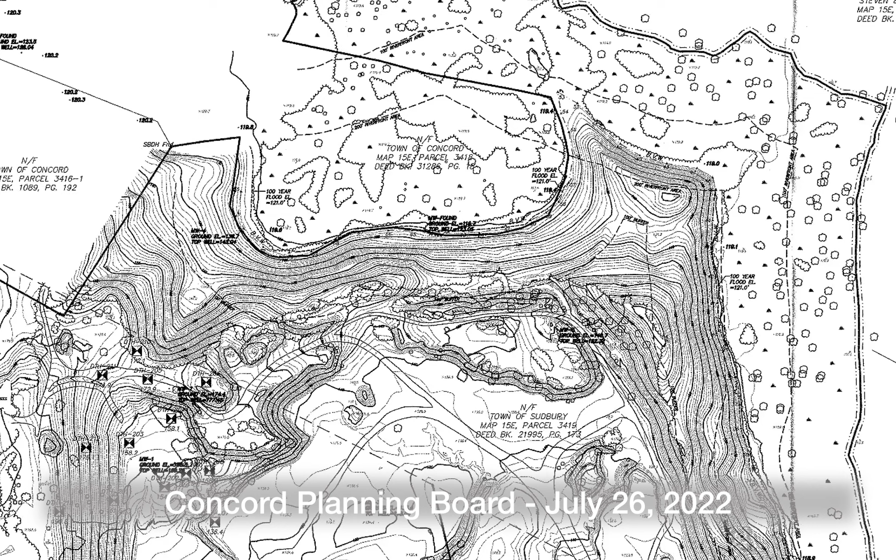You want me to stay on the existing condition screen? Yeah, if you don't mind going back to the existing conditions. So the tract itself, the portion of the tract that is in Concord, which is the subject of this PRD, as you can see from the existing topography, it really kind of tells a story that much of this tract was mined for sand and gravel.

You can see the slopes that kind of flank, so north is up on this plan, and you can see the existing slopes that flank the northern and sort of the eastern edge of where the historic gravel mining operation had occurred. And as you'll see on subsequent slides here, the proposed development is substantially, if not entirely, contained within that formerly disturbed area of the gravel mining operation.

So the topography is such that there is a slope that kind of slopes down into this site, into the proposed development or developed part of the site. And today it almost forms sort of a bowl, if you will, in terms of the topography. So it's kind of been hollowed out from the sand and gravel that was mined in the past from this area. So Chris, if you can advance to the next slide.

Let me just point out one thing. Well, actually, I'll be quiet. Okay, next slide. This is okay.

So this is one of the sheets from the plan set that has been submitted. I wanted to show this first in terms of the proposed project, because it provides an overview of the land use areas that are proposed to comprise this PRD development. So the bold line there outlines the site in its entirety. That bold, dark, thick black line, that is the 16-acre portion of the property that comprises the proposed PRD.

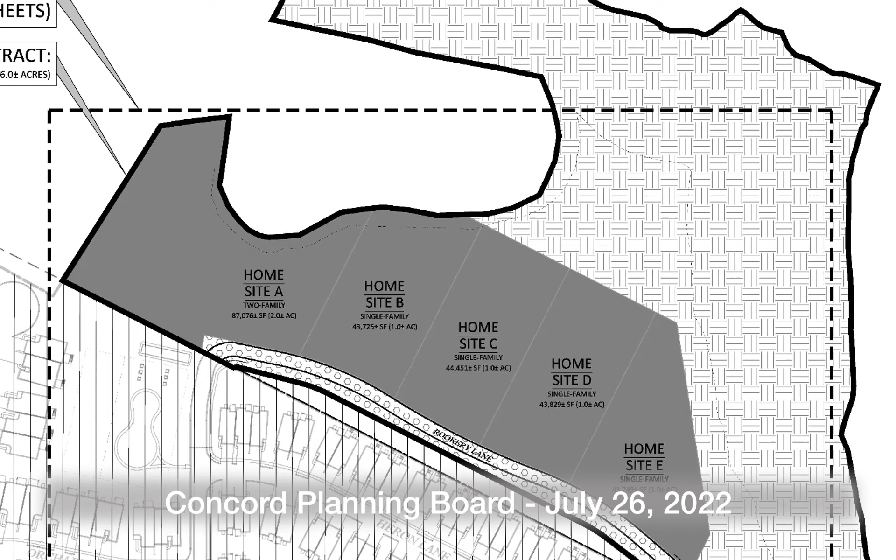So the next slide, when we go to it, we'll zoom in. If you see, there's a dash, Chris, if you can go back. Oh, yeah. Sorry. Yep. So there's sort of a dashed boxed outline area. Since much of the PRD tract is this open space, I want to just zoom in, and the plans do zoom in on the portion of this tract that is proposed to be developed. So if you can go to that next slide, Chris, please.

So this is essentially just a colored up version of the site plan that's been submitted. You can see the 6 homes here. So on the left side, or the west side, is the duplex. So that's 2 single-family homes attached. And then to the right of that, or the east of that, are the 4 detached single-family homes. All 6 of them front on Rookery Lane, which is a proposed private roadway or private driveway to serve these 6 homes.

The homes themselves will each have individual driveways off of Rookery Lane, similar to any type of residential single-family development. Rookery Lane will tie into and be accessed from the road network that is approved and under construction currently in Sudbury. I know this plan unfortunately doesn't show the road itself. If you were to go back to the previous plan, it does show that, but essentially it just connects to the approved network in Sudbury and creates a loop.

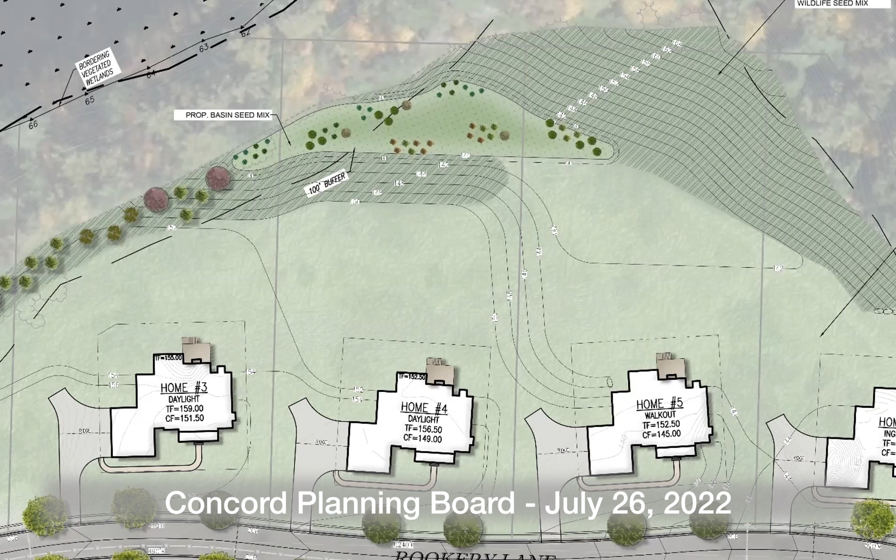And so the limit of work there, which is the limit of the color on this site plan, is the limit of the former gravel operation. And while we have smoothed the slopes out and we will be restoring them with loaming and seeding and various seed mixtures depending on the part of the site, and it's all detailed on the landscape plan, to Chris's point, it flows inward into this site and into that bioretention area to undergo the treatment.

I think that's important because all of this land here will be in a conservation restriction. And there's a blue heron rookery back in here. We were very conscious of that when we were designing this. So, with that, Chris, I'll turn it back over to you to begin the next part of the presentation.

Okay, so if the board wishes, I was going to just go through the homes that are proposed and the floor plans. Chair, that's acceptable? Yeah, that would be great. Please continue. All right, very good. So we haven't named these houses yet. I call the duplex an M plan. So we have one of those.

Each side has a 2-car garage and they're 4 bedrooms. On the front elevation, one side has a side loading garage and the other side has a front loading garage. And then on the single family side, we submitted with this application 4 different floor plans for 4 different homes to give the public a choice on what might fit. When Matt did his layout on his civil plans, he made sure that all these home options could fit within the footprint allocated for each one of these home locations.

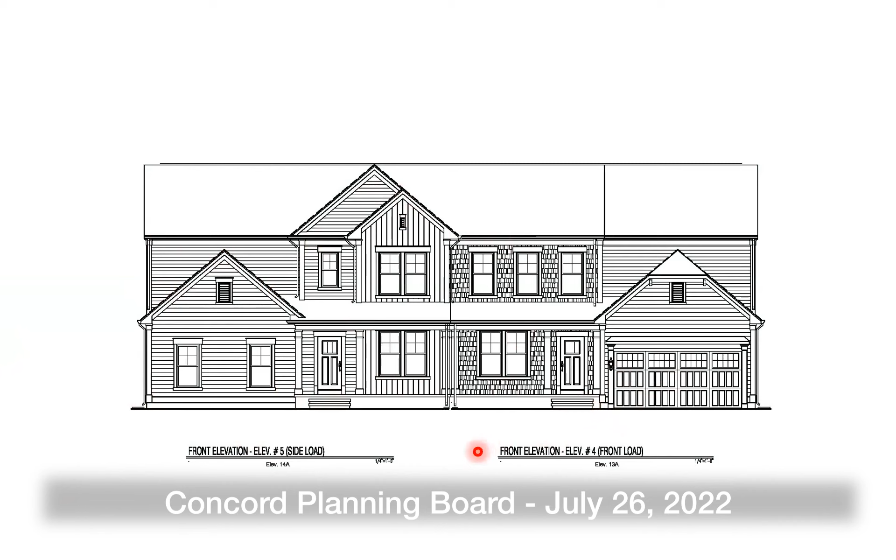All the appliances will be Energy Star, and we're incorporating energy efficient building designs into each one of these homes with insulation, high efficiency HVAC systems, and low or no VOC materials. So the first plan is the duplex. It's not a colored plan. This is the M plan. This side has a side loading garage. This is the front loading garage. Sorry, it's not colored. We have some gables for the front architecture. Both front doors are right in the front. It's a 2-story design, and there'll be a basement that goes underneath each side.

Zoom in here to give you a better picture of this. So this is the first floor of the duplex, the 2-car garage. The first floor is all living space where you have your kitchen opening up into an everything room or gathering room. A little nook here for your breakfast table. This is flex space; people might want a front room or a dining room or turn it into an office. If they don't, this would be their little office here.

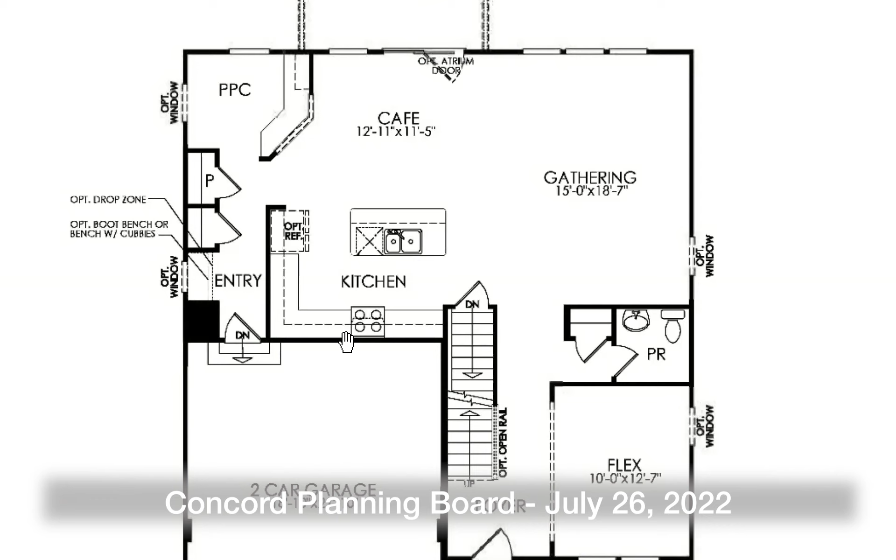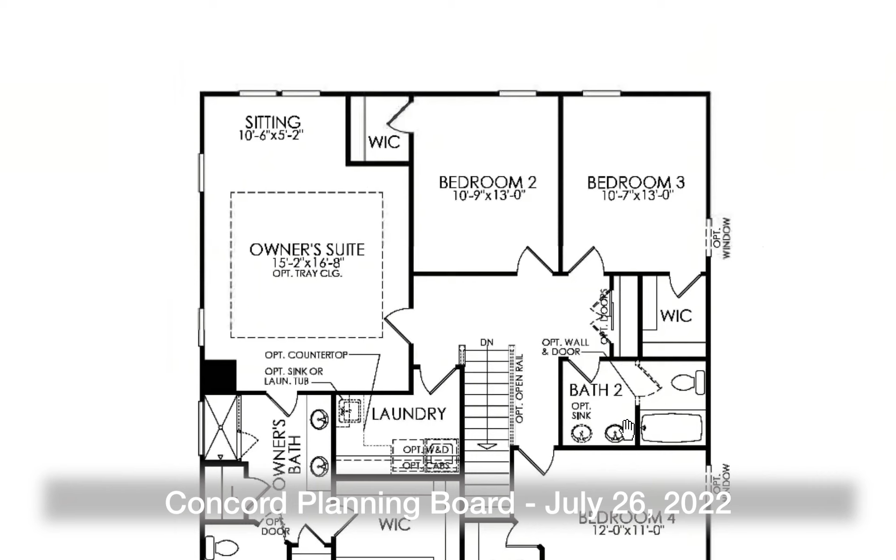Going upstairs here to the second floor, that's where all the bedrooms are located. Owner's suite is en suite with its own bathroom. We have the laundry upstairs because all the bedrooms are up here. Bedrooms 2, 3, and 4 share this bath here. So that's the floor plan for the duplexes.

Zooming in on the floor plans. Again, all the single family homes will have a basement and two floors above it. They're all consistent, and all the bedrooms are on the second floor. So this plan, our C plan, when you come in the entry foyer, the formal living room is on your right-hand side. Dining room is easy access off the kitchen.

This is the everything room, or the family room, and we have an office or library here off of that. We incorporated a deck into this plan. On the second floor, that's where all the bedrooms are. The owner's suite takes up a good portion, maybe about half of the second floor. We have a Jack and Jill setup with the bathroom here for bedrooms 3 and 4, and bedroom 2 is en suite. We want to offer some options.

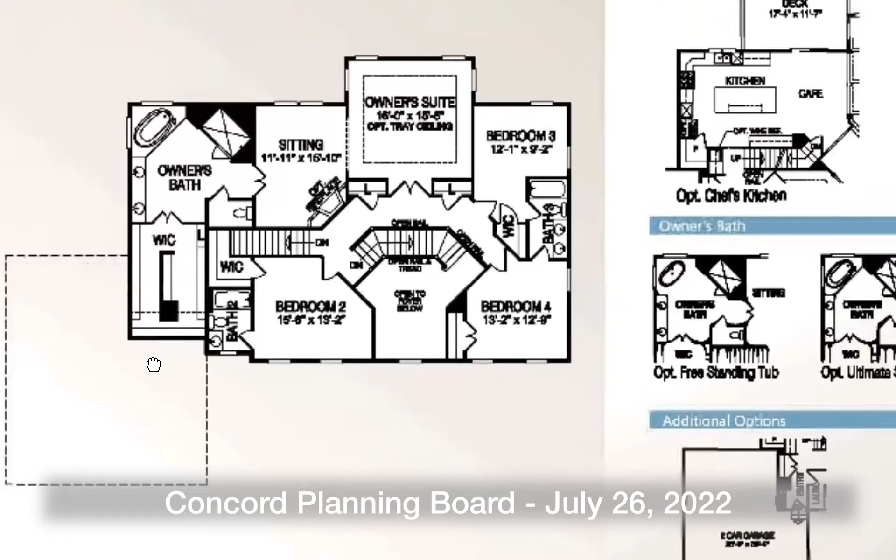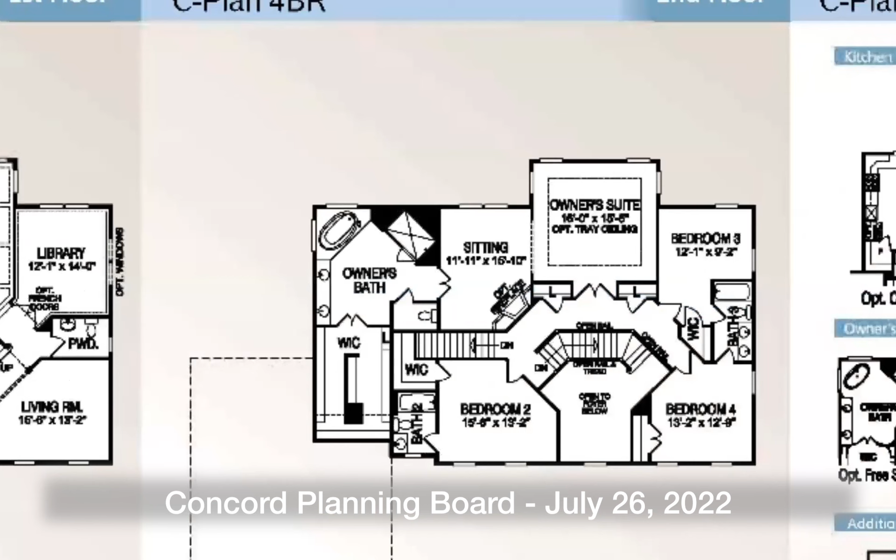We have a chef's kitchen, but what we call the chef's kitchen was when we were going to put gas in the kitchen, and so this option will go away. There's no gas, but we do offer the option to turn this room into a sunroom or a 3-season room. And then on the owner's suite, we have some options on how to finish off the baths with the standalone tubs, or more shower heads in the shower, those types of things.

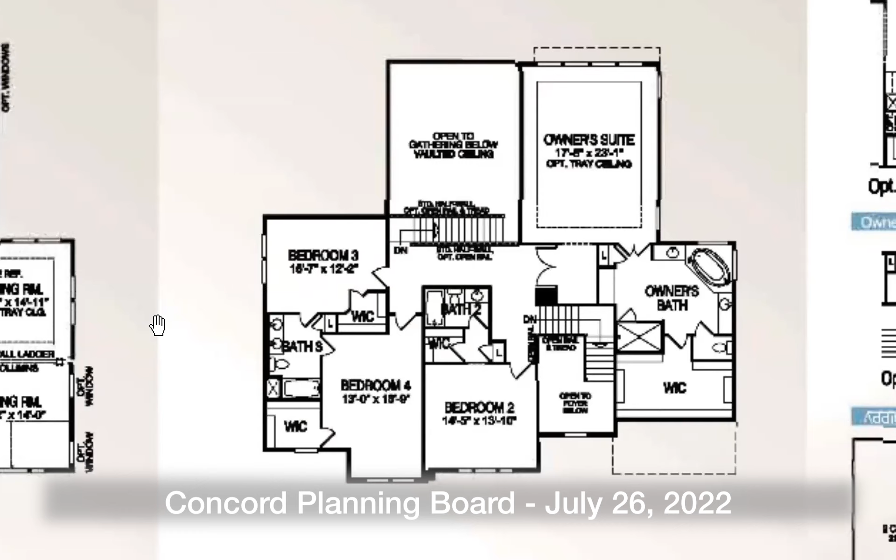K plan, we have one elevation with the K plan. Again, these are all colonial style homes. And zooming in, the second floor again has all the bedrooms. A little bit different layout here for the first floor. Still have the living room and dining room off of the foyer, but the kitchen and gathering room are oriented slightly different.

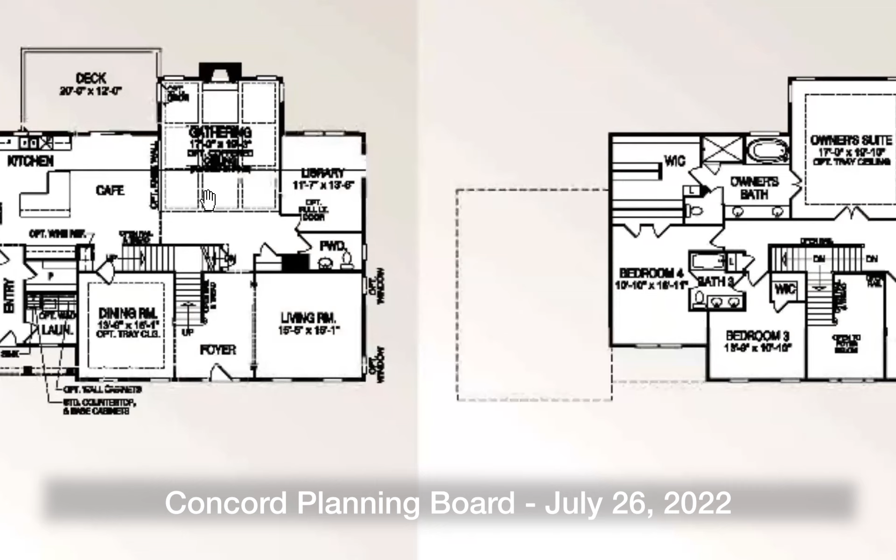And the last plan is our W plan. Again, it's another traditional colonial look. Zooming in on it, bedrooms are all on the second floor. Owner's suite takes up about half of the second floor. Living room and dining room are off the foyer. The space where you do most of your living is right here, where the kitchen and the gathering room are side by side. That's a quick overview of the floor plans.

I was going to go into a quick landscape review, if that's okay. We hired Bowler to do the landscape design for us, and they provided a plan for the single family homes and the duplexes, and then they gave us an overall plan for the rest of the property. This is the overall plan for the rest of the property, and this table here highlights the plant palette. I can go through that if it's of interest to the board.

I can tell you that we were conscious of the plant palette that was selected, and we tried to focus on plant material that could serve multiple purposes, and we felt that having some plants that could bear berries and fruits for wildlife would be important. The seed mix that we have proposed for other areas is also to help with pollinators, so we were conscious of that with the landscape plan.

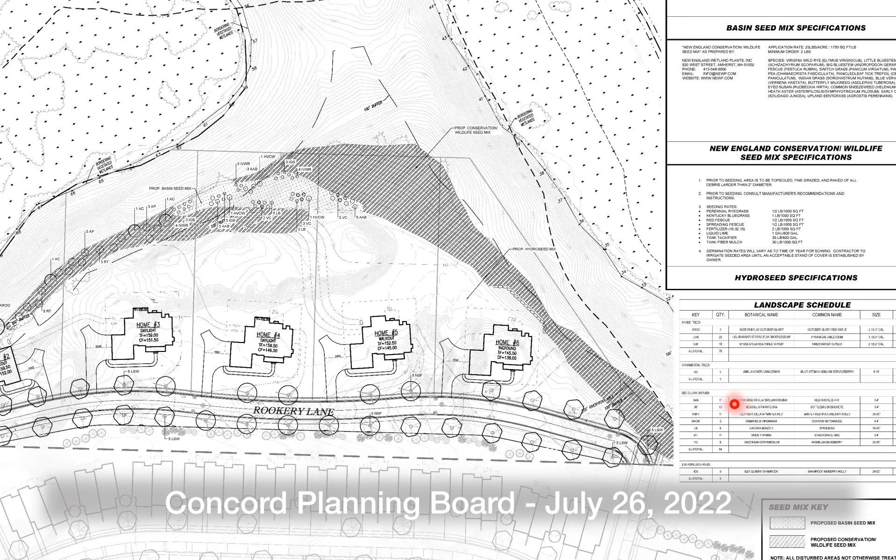And this is the basic landscape plan for the single family home and for the duplex. It includes some deciduous trees, evergreens, and some shade trees and some ground cover. Very, very straightforward. So that's the end of the overview.

I just wanted to share with you a couple of comments on the town planner's report that we received. There were a couple of items that were highlighted that I wanted to bring to your attention. We understand that the diversity of dwelling units needs to be addressed, and we're going to address that with staff.

One of the checklists is the difference in price points. I can tell you that this duplex will be priced probably $500,000 to $700,000 less expensive than a single family home. We haven't got that far in determining what the value or what we can sell these things for. As you can appreciate, the whole world of construction changes by the minute nowadays.

But we do know that the duplexes will be significantly less expensive. We will follow up with planning on addressing that.

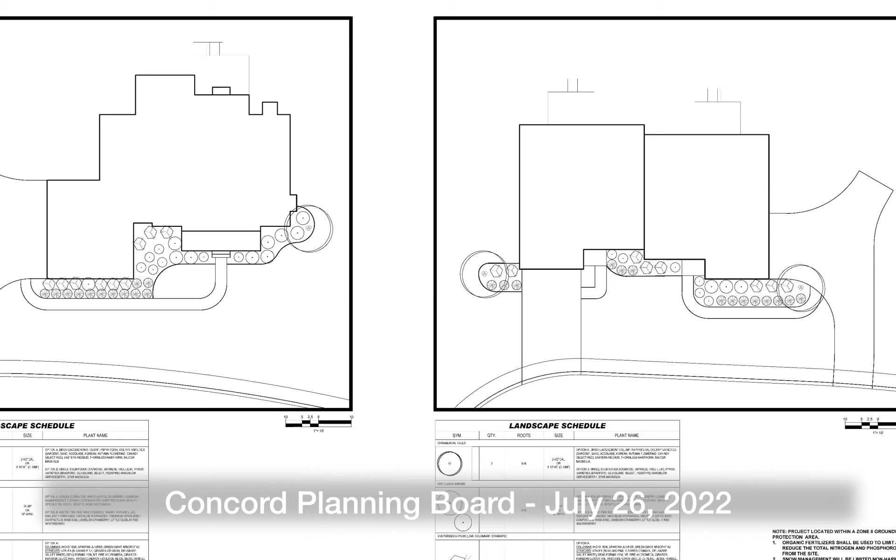Within that home footprint, the existing topography varies from the 150s to almost 170, so we're right in that range with the proposed footprint of that home. As you move farther east on the page, we end up more in a fill condition. So I'd say the duplex is probably the closest to existing grade of any of the homes.

As you move toward the east on the project, the existing depression or cut becomes more significant. In order to harmonize with the land itself, but also with the adjacent development in Sudbury and the perimeter grading of the former gravel pit, we fill more and more as we go east. So the homes toward the east are in more of a fill condition than that duplex home on the west end.

So, are you able to go back to one of the earlier slides that showed the topography? The black and white one, I think. Yep, kind of where you had the mouse hovering just there. Right.

It seems like basically to the northeast, northwest of where the duplexes are, that's quite a steep incline. Is that correct? Yeah, it's correct. Not just to the northwest of that duplex, but really that northern edge of that slope, which slopes northward toward the wetland beyond it, which is where it flattens out. That whole outer slope is steep, and we've intentionally stayed off of that slope.

And there's no work that needs to be done in terms of any retaining wall to secure that? It just seems very close to where the duplex is. No, you're correct, there's no retaining wall. The grade in that area—as I mentioned, that duplex is the closest of any of the buildings to existing grade—it's for that very reason, because we want to more or less match the existing grade there. We don't want any significant cut or filling in that area because of the slopes.

As you move to the east, it's hard to pick up on this plan at this scale, but that steep slope wraps the northern edge and then wraps down the page to the east. The northern half of that is sloping toward the wetlands, but the southern half is actually sloping into the site to the south. There's a ridge—that's all a ridge line—and we're contained within that ridge line.

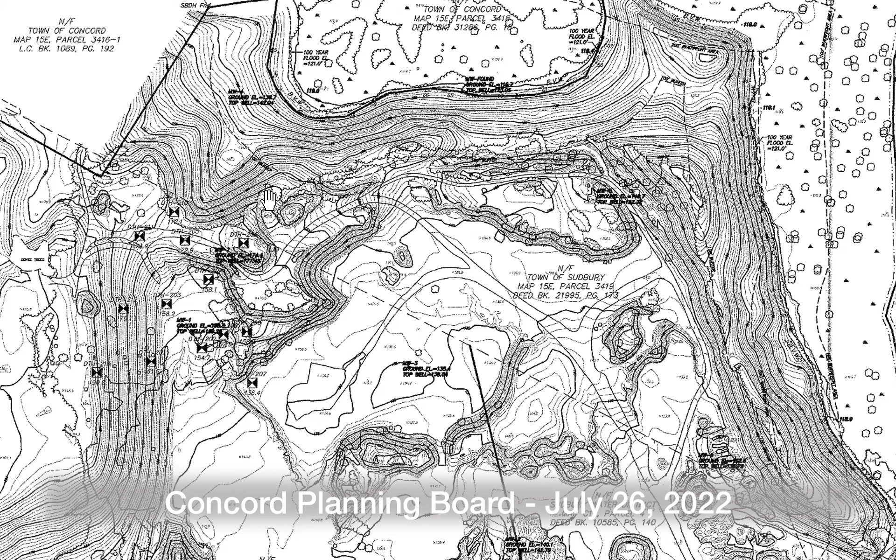So it's really just that western end you're talking about, that's not as much of a ridge as just a slope out toward the wetland. That's where we've matched more or less the existing grade, to prevent any significant grading and certainly no retaining wall up in that area. So we're pretty well married to the existing grade on that western end for that very reason. That's a great question, great, thank you.

Just two more quick questions. For the EV charging, is the plan to have 240 outlets in the garages for each of the existing spaces, or just one? I don't know the answer to that—I'll have to talk to the architect. I think from a market standpoint, if people want an EV charging station for each stall, we're going to put it in for them.

The only other question I had is about the driveways. It looks like currently all of the houses are oriented so the garages face basically to the west. Elizabeth, this might be more of a question for you—what are the rules around having a shared driveway? Say if the four single family homes had garages facing each other and shared a common driveway to reduce the amount of impervious surface.

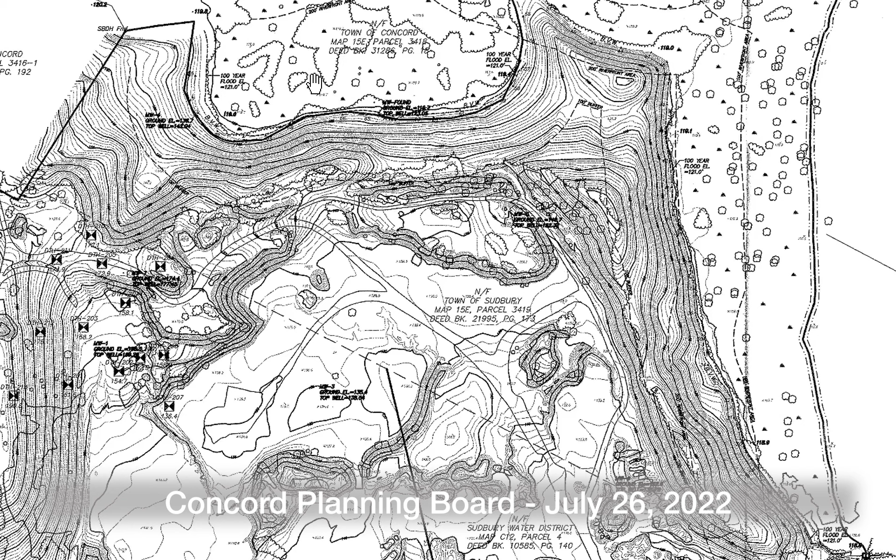And so the homes themselves are stepping down, with the duplexes being the highest of all six. Every single home steps down vertically as you go eastward. So we very intentionally have the driveways separate from one another, and also all on the west side, which is the high side of the units.

The reason we do that is because of the elevations of the homes themselves, so the top of foundation elevation, we set that based on the road grade along that particular lot's frontage. We don't want a home depressed or lower than the road grade. That's really kind of a no-no from an engineering standpoint. It's not desirable. We want the home to be at or slightly above the road grade.

So in this case, it's really the road grade at the high end, the left end of each lot, that sets the house grade, the top of foundation. Having the driveway on the uphill side allows us to have a very gently sloped driveway coming into that unit.

If we were to either combine and share driveways for adjacent units, or even just mirror some of the buildings to have separate driveways but facing each other on opposing sides of the building, there's a grade difference. The driveways have to be held high because the garage elevation is a function of the first floor elevation, so the garages are high. We'd have that elevation difference between adjacent units, and driveways would have to be made up in a much shorter distance than if we keep the driveways on the high side.

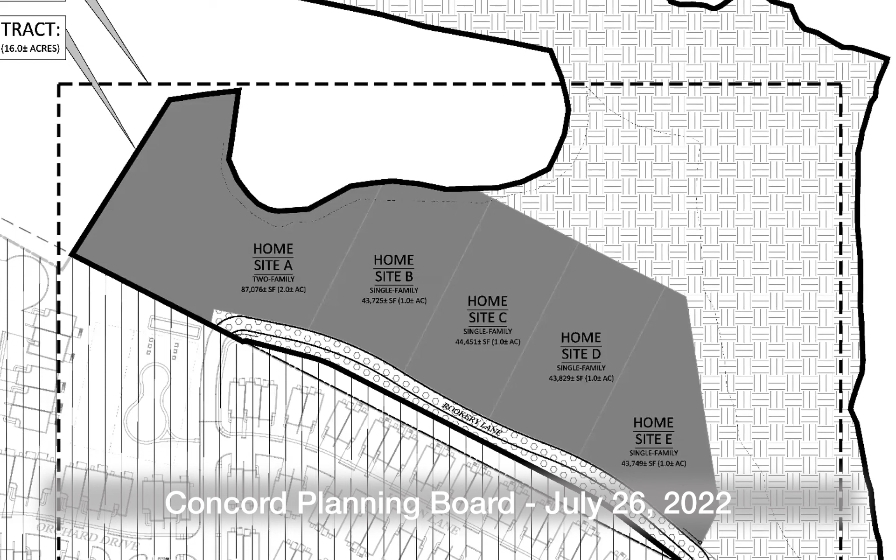Yeah, so is that the 100-foot buffer or what is that? That's the buffer zone line. Yeah. Okay. So again, just confirming what I saw in the plans, it looked like there will be work inside that for the duplex, as far as I could tell, but that's covered by Natural Resources. Elizabeth? Yeah, so the applicant has filed for the notice of intent. It is on the agenda, I believe it's August 19th. 14th or 19th, somewhere in there. Yeah, it's Wednesday. Right. It is on for August.

No, how about the 17th? I sent the abutter notices out, so I just remember. I thought it was. I'll have to look that up, Haley, but so part of that first meeting and prior to that meeting, the actual wetland delineation will need to be approved by Natural Resources.

And it's my recommendation that the board finish its questions, its discussions tonight and continue this out to the August 23rd meeting, which will allow engineering and all of the other information that Mr. Clausen talked about to be submitted and reviewed by staff and a revised report. And if the board has any indication on which direction they'd like to move, that can take place. So before the August 23rd meeting, that delineation will be reviewed by Natural Resources.

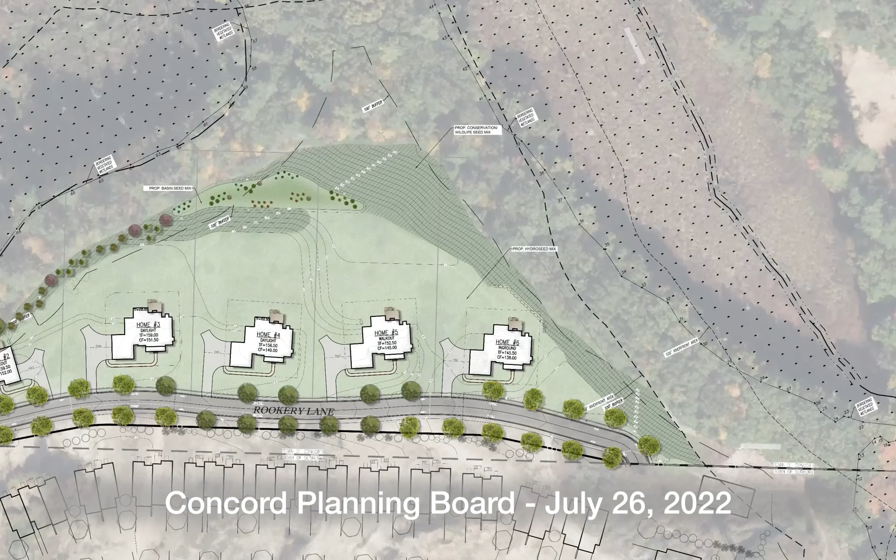Chris, if you can scroll back one. Okay. So the dark gray area is the exclusive use areas for each of the home sites. The checked area that wraps around it, that will be all of the common open space for the project that will be under a conservation restriction. Right, so it doesn't look like the duplex people have any ability to walk along the back of the site unless the homeowner of site B grants them some sort of easement to walk over at the back of their yard.

Okay, so this is where, at this scale, that 25-foot no disturb comes in. That 25-foot no disturb is what was requested be included in the common open space, so that the exclusive area does not run exactly up to the edge of the wetland. That 25-foot buffer will actually wrap around that piece of town-owned land. Okay, so in essence, the 25-foot buffer will become checked. Yes. Wonderful. There's just no way you could ever see it on that plan.

Sure, excellent. Now, on the point of shared driveways, I understand about the 4 detached single-family dwellings. I wonder if the duplexes could have a shared driveway in order to reduce impervious pavement. I understand that they're elevated differently by 1 foot, but that's a minor enough difference that I wonder if it would be possible for them to share driveways. Well, the garages are on the outside of the duplex, so it would require reorienting the garage on one of them. So your question is whether a different floor plan with the garages back to back on the interior? That is in essence my question, yes. Okay, so that is something that I can explore with the applicant and the engineer.

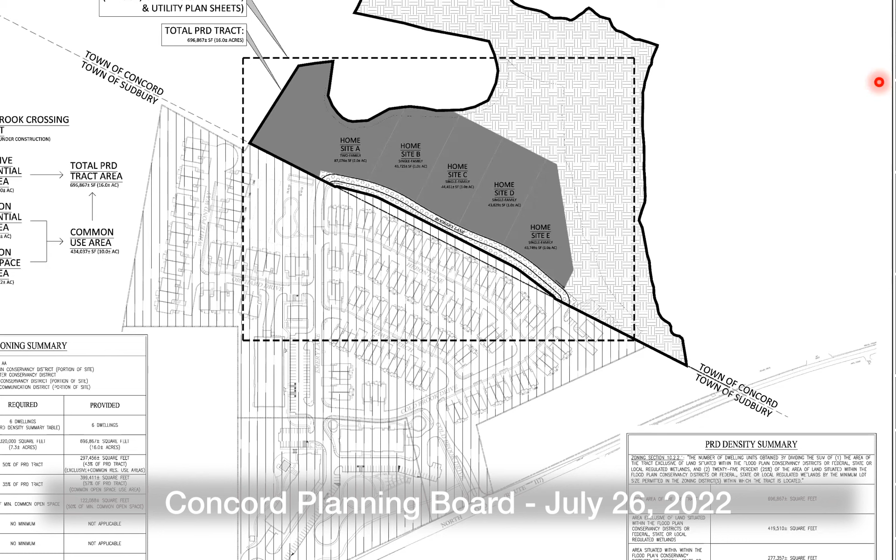Okay. I should have said this at the outset. If you would like to make a public comment, please use the raise hand function and I will hopefully see you and try to make a call, or if anybody else sees somebody with a raised hand, let me know. I'm not seeing one. I'm scrolling through. Oh, we have Scott Richardson. Hi, couple questions. Oh, please introduce yourself. Scott Richardson, 260 Elsinore Street.

Thank you. I didn't hear during the presentation the actual size of the homes. What's the range of the square footage of the homes? The duplexes are 2,700 square feet approximately. And the single family homes range from around 4,200 to 4,600 square feet under air. And does that include the basement? It does not include the basement, but it does include those options I was showing the board earlier, such as turning the patio into a 3-season room.

Sure. Okay. Thank you. And then a question about the site itself and construction of the site. Will you need to be bringing in materials to level up the earth? No, we have enough material on site to take care of our fill needs. Including dirt for the landscaping?